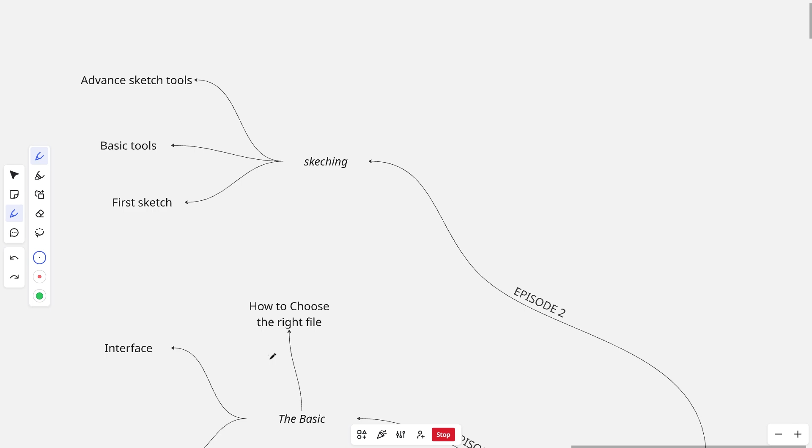When you open the program, you will see three options: part, assembly, and drawing. Part, or .sldprt, use this when you design a single 3D object, like a bolt, bracket, or gear. This is where most modeling begins.

Assembly, or .sldasm, choose this if you want to put multiple parts together. For example, you can connect a shaft to a wheel and see how they move.

Drawing, or .slddrw, this gives you a 2D technical drawing of your part or assembly, with dimensions, notes, and views. It's great for documentation or sending to a manufacturer.

So to keep it simple: use part to model something, use assembly to connect parts, use drawing to make blueprints. That's it. Let's begin sketching.

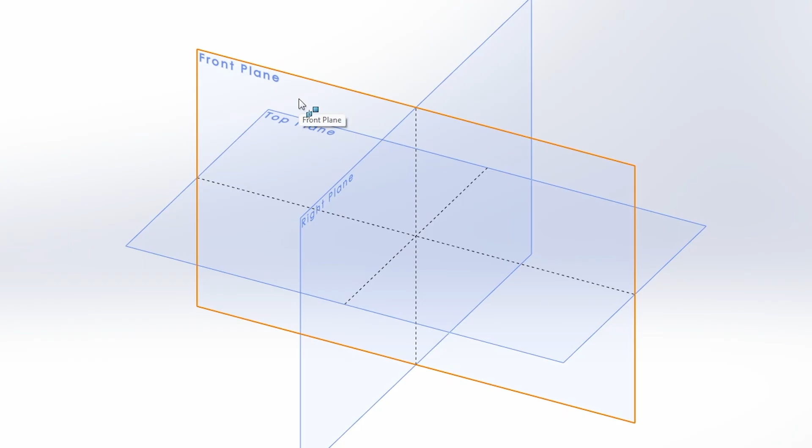First, head over to the Sketch tab and click Sketch. That puts you into sketch mode. Now pick a plane: front, top, or right, depending on how you want your part oriented. Once you click a plane, SolidWorks will rotate your view straight onto it, and you are now ready to draw.

Let's start with a simple rectangle. Click the rectangle tool, you will see several options. First, the corner rectangle, great for general shapes: click one corner, drag, and click the opposite corner.

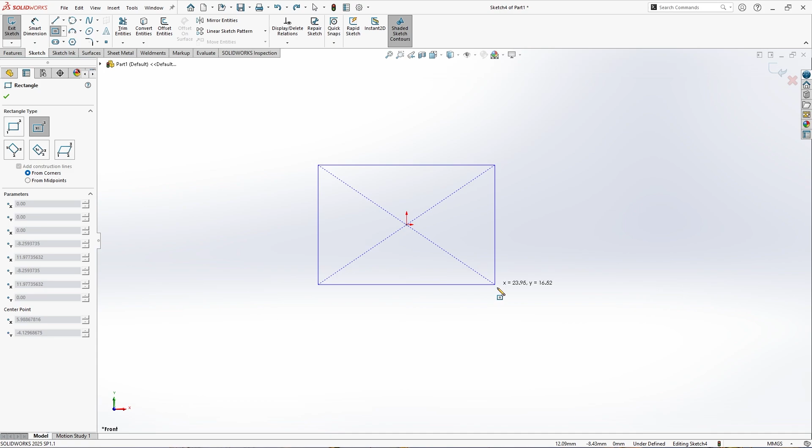Then the center rectangle, perfect for symmetric parts: click the center, drag outward to define the width and height. After that, the 3-point rectangle lets you define rotation: click for width, angle, then the height.

And finally, the parallelogram, ideal for tilted or slanted shapes. Each of these is great depending on how you want to start your design.

Now let's walk through the essential sketch tools. I will show you an example of each in this video. Let's begin with the line tool.

First, the line, create a straight segment between 2 points, great for defining edges. Then the center line, a dashed line used for mirroring or symmetric reference. And finally, the midpoint line, automatically centers the line and extends evenly in both directions.

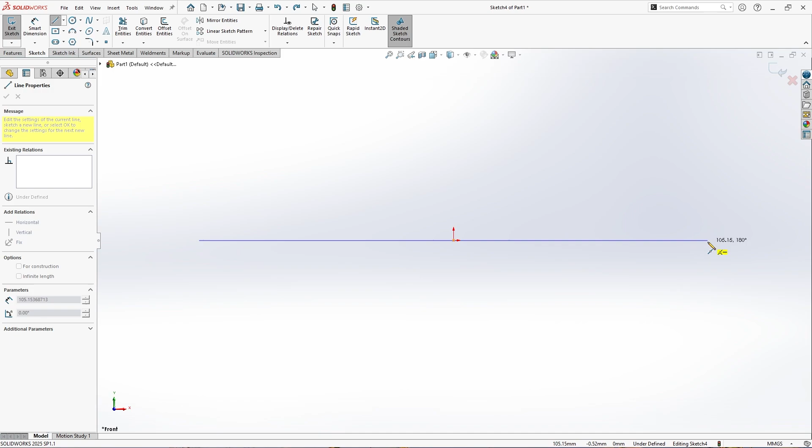Next, we have the circle tool. Start with the center diameter circle: click the center point, drag out to set the size, useful for holes or rounded features. Or go with the 3-point circle, define a circle by placing 3 points along the edge, helpful for tricky layouts.

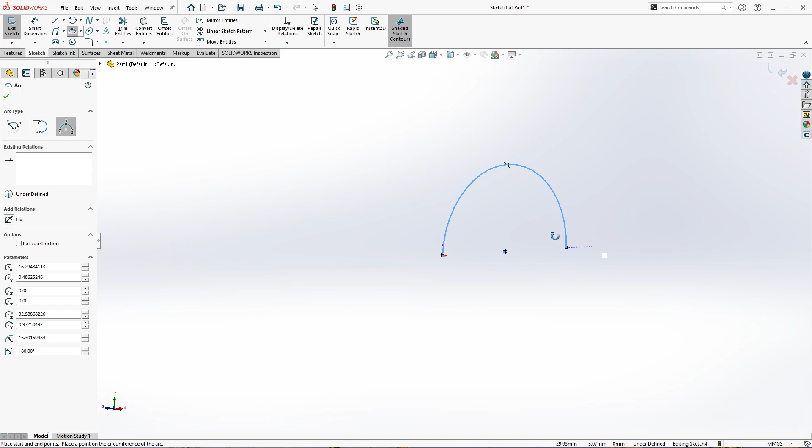Moving on to the arc tool, perfect for rounded geometry and smooth transitions. Try the 3-point arc: click the start point, end point, and third for the bulge, commonly used in fillets or cutouts. Then the tangent arc automatically continues from a line to keep the curve smooth.

And finally, the center point arc, start from the center, then define the arc span, great for controlling the radii.

Now for the ellipse tool. Start with the standard ellipse: click for center, width, and height, ideal for organic shapes. Or use the partial ellipse when you only need a curved section, like in lens profiles or flow bodies.

Let's continue with the slot tool, great for mechanical design involving fasteners. Begin with the straight slot: 2 clicks, set the center line, then define width, perfect for bolt clearance. Then the center point slot, start from the middle and drag outward, more symmetric.

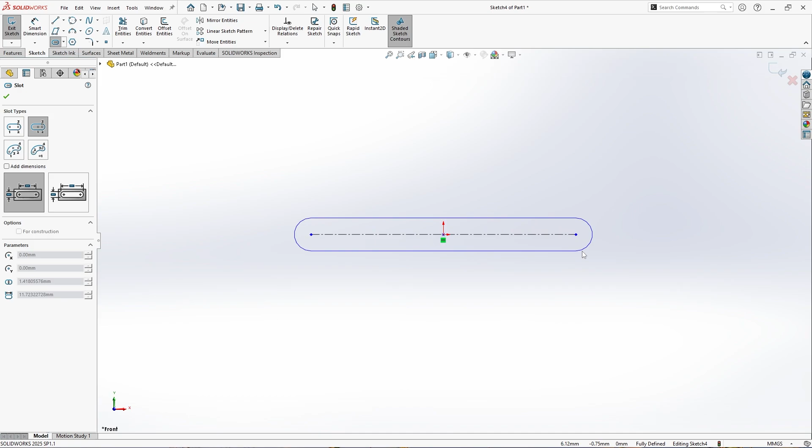Or go for the arc slot, create curved slots for adjustable parts or sliders.

Next up is the polygon tool. Pick how many sides you want, then choose between inscribe, which fits inside the circle, or circumscribe, which wraps around the circle. Handy for creating gears, bolt heads, or special keys.

Now let's look at the text tool. Click inside the sketch area to type your label, ideal for engraving or embossing. After that, you can customize font, size, bold, italic, or even wrap the text along a curve. Great for product branding. Then we have the fillet tool.

Select 2 lines and enter a radius to create a rounded corner, adding strength and a clean look. Following that is the chamfer tool, like a fillet but with a straight cut, at a distance or angle between the 2 lines, often used in mechanical fitting.

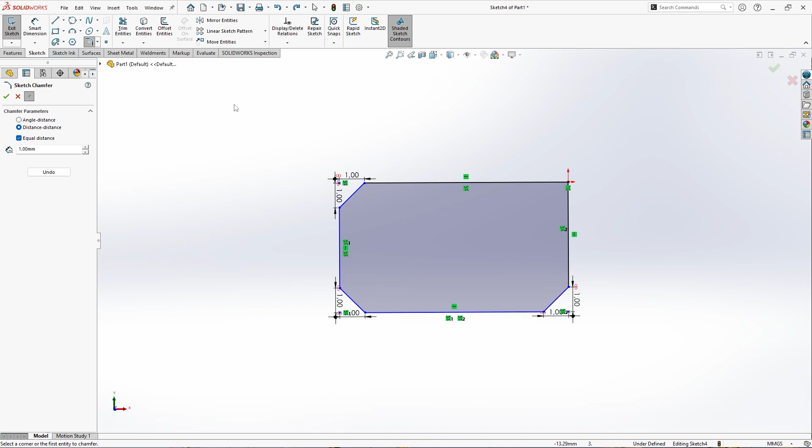And finally we have the point tool. Click to drop a reference point, super useful for hole centers or marking intersection locations.

Now that you've drawn some basic shapes, let's talk about tools that help clean up and modify the sketch. First we have trim entities. Use power trim to freely trim sketch segments by dragging your mouse like a pencil.

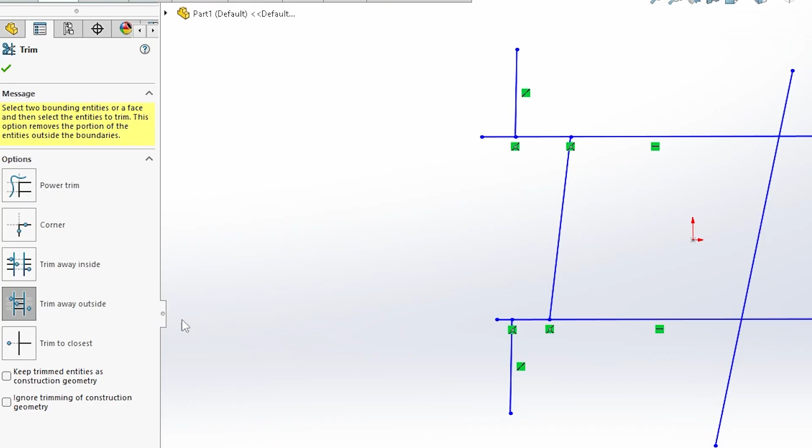Then there's corner trim. It keeps the sharp corner while trimming the rest. Or choose trim to closest to automatically cut at the nearest intersection.

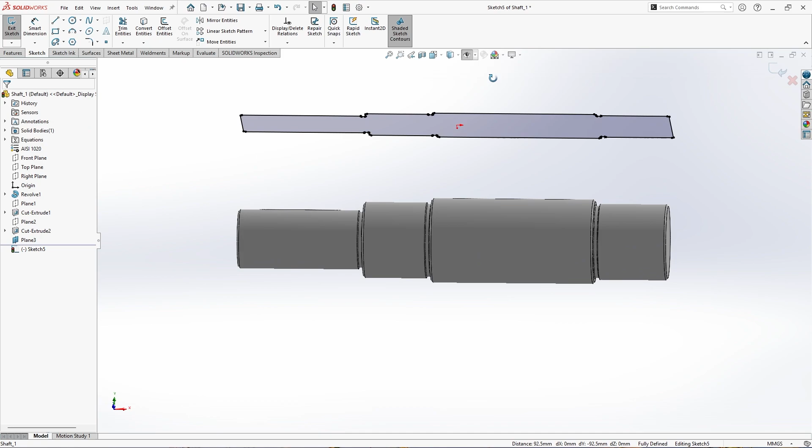Next is convert entities. This tool is super handy when you want to project the edges or faces of a model into your current sketch. You can also use silhouette entities to trace the outer shapes of a 3D model, or intersection curve to capture where your sketch plane slices through a 3D shape. Great for advanced surface modeling.

Let's move on to offset entities. This tool lets you copy your sketch line at a fixed distance, perfect for outlines or gaskets. You can also reverse direction, cap ends for closed loops, and convert the base into a construction line.

Then comes mirror entities. Select the sketch you want to mirror, then choose a center line as the axis. Make sure to check the copy option if you want both the original and the mirrored version.

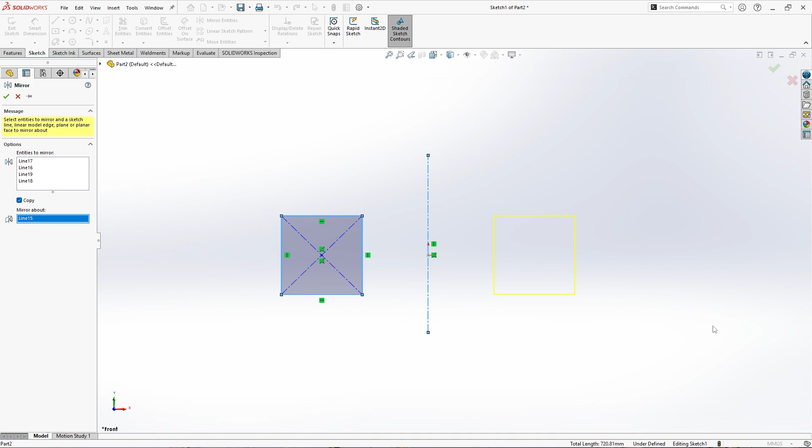Now let's talk about the sketch pattern. Use linear pattern to repeat shapes horizontally or vertically. Great for bolt holes.

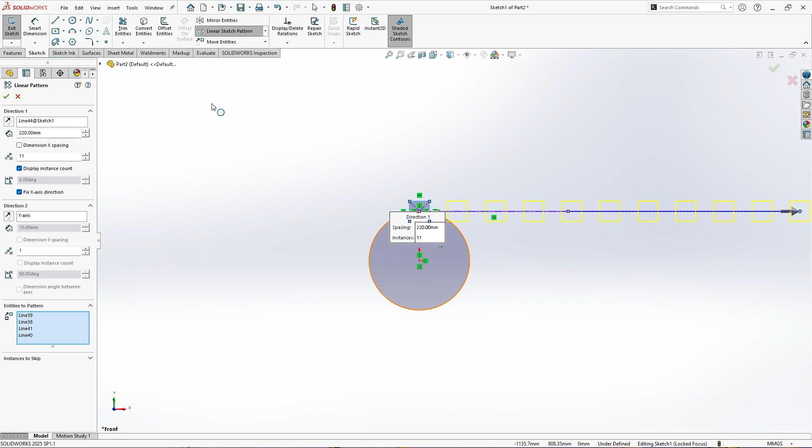Or try circular pattern to duplicate a feature around a center point, handy for gear teeth or hole arrays.

Finally, we have move, copy, rotate, scale, and stretch. Use move to shift your geometry. Use copy when you need an exact duplicate in a new location.

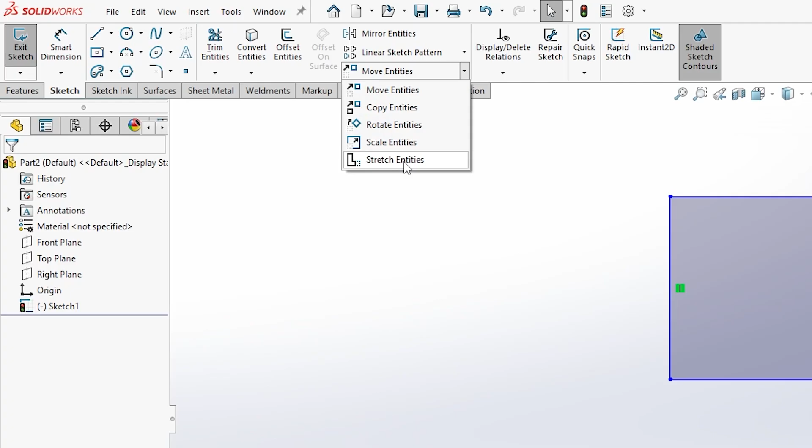With rotate, define a center point and angle. Scale helps you resize everything proportionally. And stretch allows you to select specific segments and drag them to reshape, very useful when editing contours.

Once your shapes are in place, it's time to lock them in with dimensions and constraints. We start with Smart Dimension. Just click a line or 2 points, and you can set the length, width, diameter, angle, whatever you need to define the size and shape.

As you add dimensions, pay attention to the sketch color. Blue means your sketch is underdefined, it can move around. Black means it's fully defined, locked in place. Red indicates it's overdefined, meaning there's a conflict, maybe too many constraints.

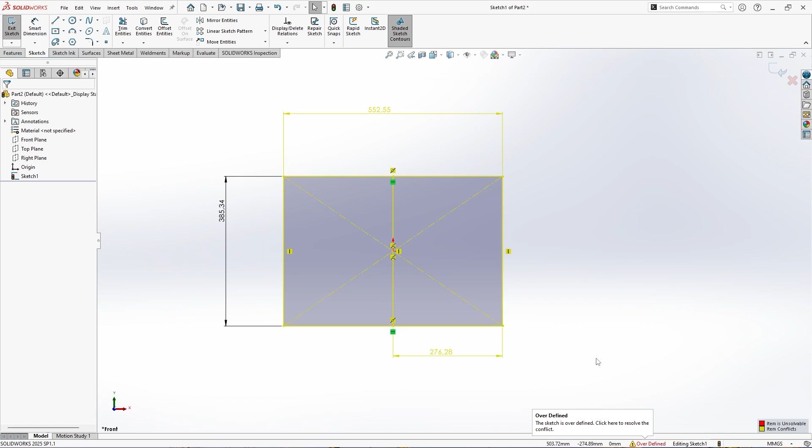To keep your sketch stable, SolidWorks also uses sketch relations. You can make lines equal, horizontal, vertical, parallel, perpendicular, or even fix a point in place. This helps make your sketch logical and consistent. If you want to check or edit the constraints, just right-click the sketch area and choose Display or Delete Relations. This gives you full control.

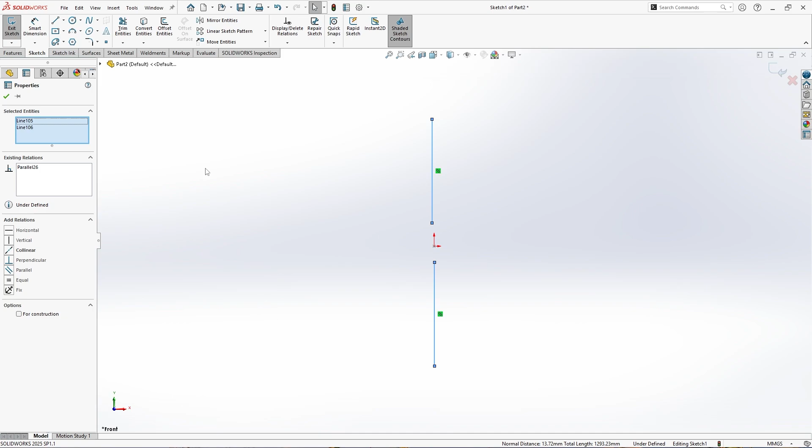Alright, that's it for episode 2 of the SolidWorks Bootcamp. Now you know how to start a sketch, use the main tools, and make everything precise with dimensions and constraints. In the next episode, we'll turn this sketch into 3D models. So, see you in episode 3.